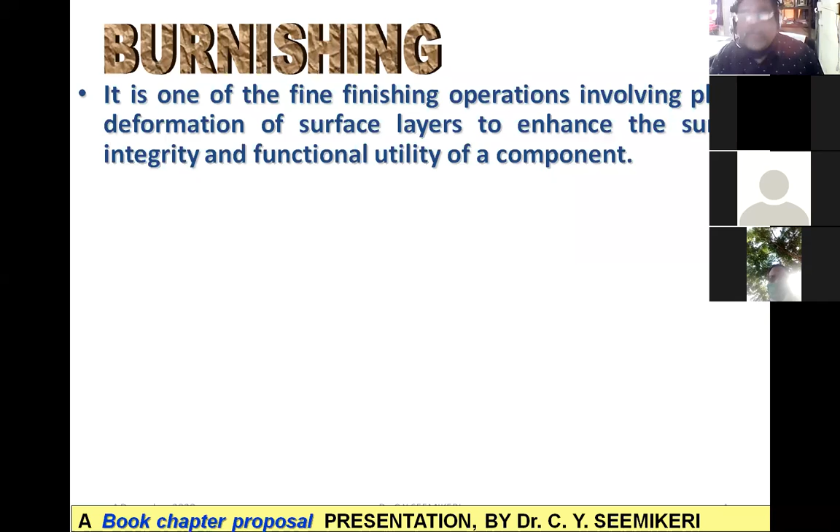We are going to deform it. Definitely there is some reduction in size, and the metal is pressed by a tool, and therefore it undergoes plastic deformation. Thereby the surface layers are pressed to enhance the surface integrity. The better word is surface integrity. I'll talk about that, and then functional utility, so that the functional performance would improve.

Basically, burnishing is a secondary operation, not a primary operation. A primary operation will be like turning, milling, shaping, grinding, etc. Even electro-discharge machining is one of the best primary operations, but it gives a rough surface basically. Electro-discharge machining will give rough surface, even welding. So to enhance the other properties, we go for burnishing as a secondary operation.

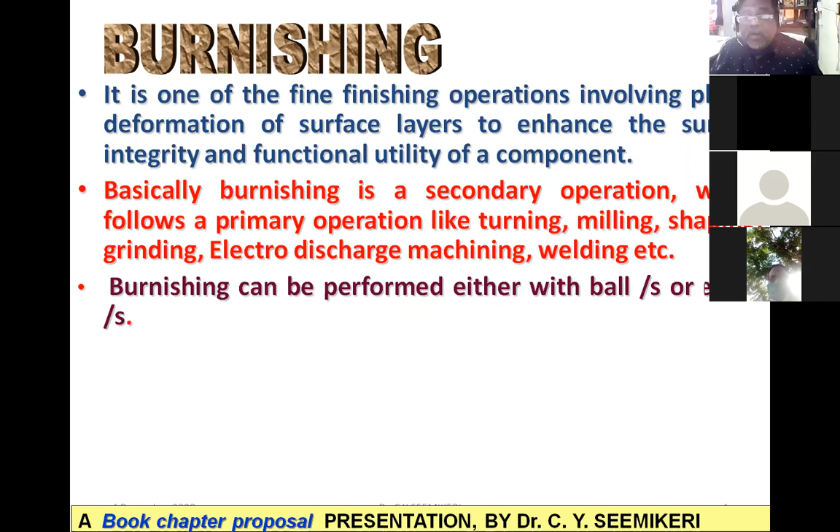Burnishing can be performed either with a ball, one ball or many balls. We can use any type of ball. We'll talk about the material of the ball, the size of the ball and all that. There are wide varieties of ways in which you can use the ball, or sometimes people ask, sir, why not roller? Yes, you can use roller also. So ball or roller can be used in burnishing.

Depending on that, burnishing has been classified into many research potential areas like ballizing. Ballizing means you already drilled a hole, you take a ball and press it inside the hole, and you remove the ball through that. Thereby the hole particularly drilled will be strengthened, and also the shape of the hole will be perfectly circular. So it's called ballizing. A lot of work is going on in Russia still.

25, 30 years back the work was going on, and still a lot of work is going on. Ballizing is another research area. Then burnishing is one general area. Again, there's vibratory burnishing.

If you press that particular ball continuously, it's burnishing. If you have intermittent burnishing, where there will be a little bit of vibrations created, excitation is created for the ball, so that the ball will be continuously, with certain amplitude, hammering on the surface, it's called vibratory burnishing. Again, it can be done with a ball or roller.

And once again, you will have ultrasonic burnishing, where you can create ultrasonic waves. It's one of the latest areas of research undertaken in America right now, in USA, with Lambda Research. Also NASA is undertaking such research work, ultrasonic burnishing. A lot of work is going on.

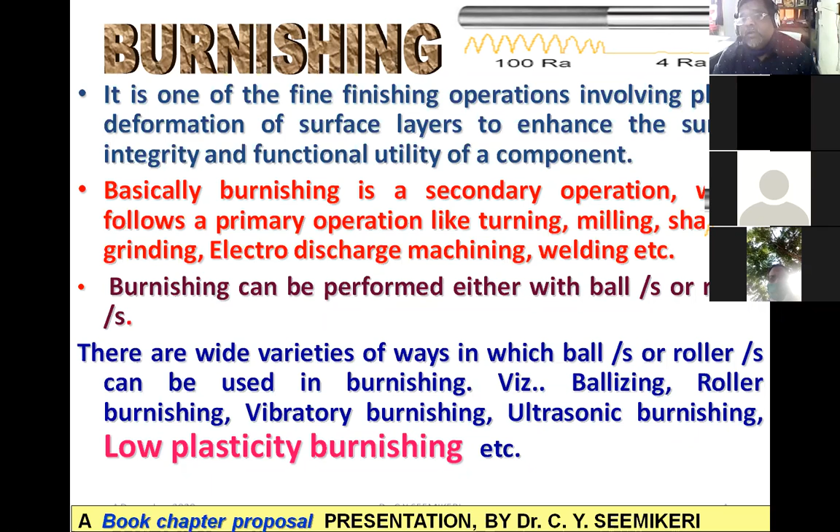That figure shows the surface roughness will change from a certain microns rough surface into a better finish. Schematically, this LPB, low plasticity burnishing, has been shown. In most situations in mechanical burnishing, the ball is pressed by a mechanical force using a spring and all that. The beauty of this particular plastic burnishing is the ball is pressed not by the spring but by the supporting fluid. That's what is shown in the screen.

That particular fluid is forced through the tube, and that fluid pressure is applied through a power pack, hydraulic power pack. So I have designed a particular tool, my research work involves designing the LPB tool. The new LPB tool was designed long back, and a separate ball is kept and pressurized by the hydraulic fluid, which in our case is called the laboratory power pack, utilized to support it so that you can apply uniform pressure.

The beauty of the hydraulic systems is usually you can apply very less pressure also, and constant pressure. That is the beauty. Therefore I utilized oil fluid. Perhaps you can utilize it, even use air also, for a pneumatic burnishing tool. You can undertake that; there's a lot of innovation one can do.

So the ball is pressurized by a certain fluid bearing I have designed, and that is applied on the surface, and the ball will be moving. You can use one ball or more number of balls. I have used only one ball in my case.

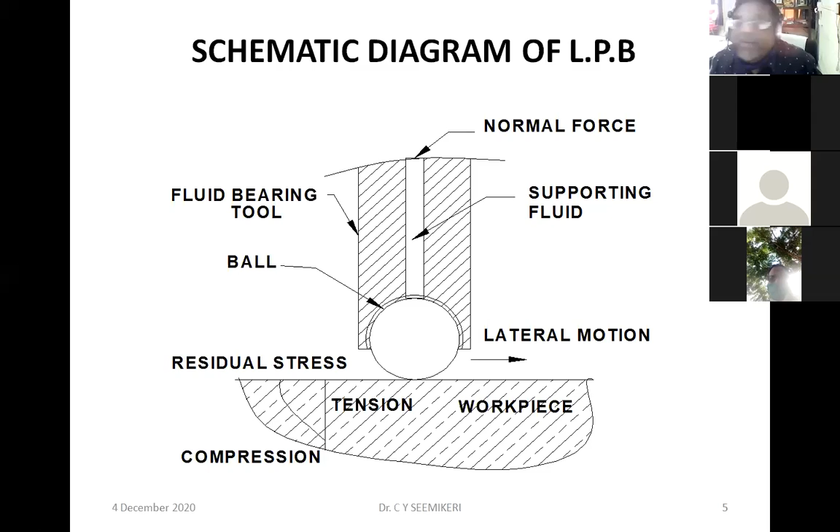So this is the schematic diagram which I have applied. This is the conventional burnishing tool applied to a lathe machine.

My focus of research at that time was this: I am a person from a Polytechnic background, from Ratnagiri, sitting in a corner of Maharashtra where nobody comes for research work, nobody prefers that place. So I thought, why not create some research for our own people, our own public? The technology which is hi-fi available in America, why can't we apply that technology to my rural area and rural people, small workshops, so the technology can be taken from ground level and used in their conventional machines to enhance the strength of their materials.

Why not, I thought. So I designed this particular tool using my laboratory equipment. Hardly any pressure power is applied, and a lathe chuck was used to hold the job while machining.

Then the tool is applied directly on the surface, so instead of machining, now I am pressing the job with my tool. So the beauty of the technology is bringing rural people technology to the common man.

Just like community polytechnic, I was a project officer for community polytechnic, so I thought I can transfer this technology for my rural mass, for the common man. Right now it's called Unnat Bharat Abhiyan.

Back in 2003, I thought why not such simple technologies, though people say it is used in NASA and all that. I also received a letter from NASA, from one Mr. Ramakrishna, the letter is also with me, saying you are doing wonderful work in this scenario. We want to join hands with you so that the technology can be imparted to Indian people. But at that time I had not completed my PhD, so my guide wrote a letter to them saying let him complete his PhD first, then we'll think about that.

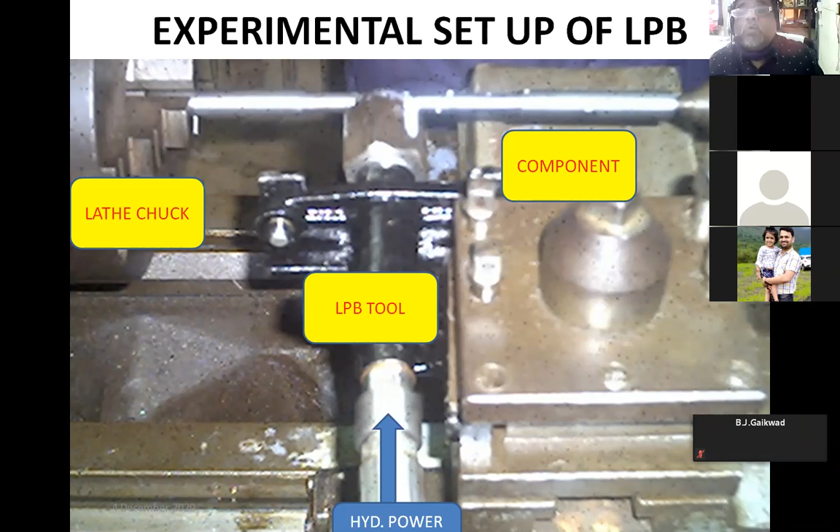So people wanted to join hands with me once I made the technology feasible and possible for the common man. That's the beauty. Therefore friends, I'm requesting you, those who want to continue this work, I'm there to support you.

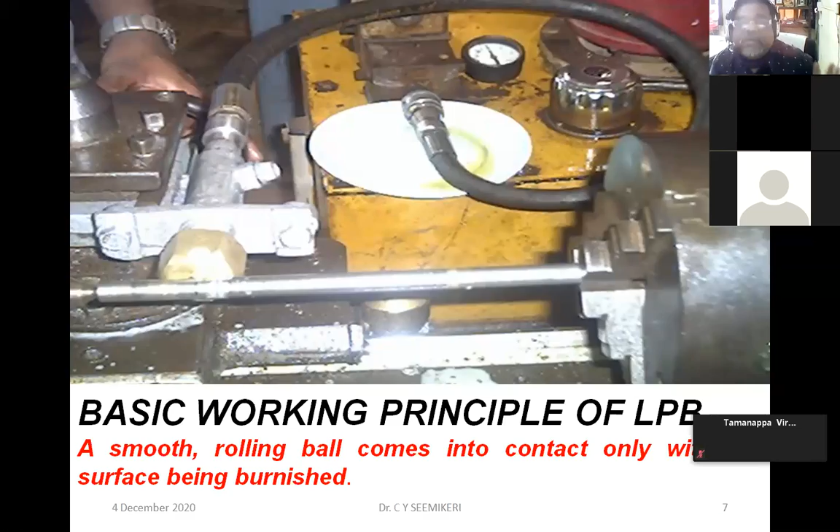In my second point, I told you what is meant by surface integrity, a new field. My focus was overemphasized by one particular paper on a new field called engineered surfaces. The word engineered surface means the surfaces are engineered, doctored, I would say.

Doctored means the surface is changed. So engineered surface, I read this paper that regards it as one of the effective and economic routes to successful manufacture. In 1998, when I completed my master's degree, I read this paper. It's still available, please read it.

The author wrote that once you get the surface out of any machining or manufacturing method, a smart thing you can do is engineer the surface, changing its properties. So inspired by that paper, I concentrated on surface integrity.

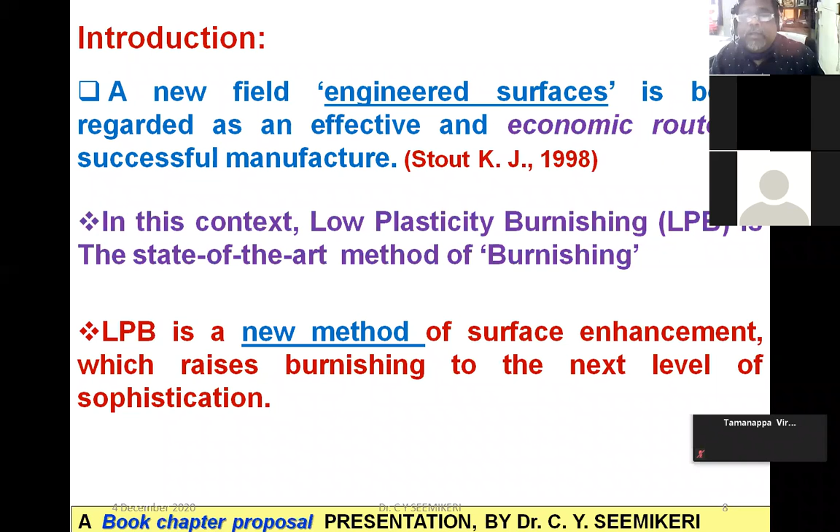In this context, LPB, the state-of-the-art method of burnishing, is a new method of surface enhancement which takes burnishing to the next level. It's one of the best engineering surfacing methodologies, which I am introducing today for burnishing various surfaces. So what does surface integrity mean?

The surface condition is going to be increased, basically changed, because we are making a lot of alterations, a lot of surface changes. As I mentioned earlier, maybe you are introducing machining or welding etc. What you are doing is inculcating mechanical, metallurgical, chemical, electrical, and biological changes to a surface, so surface alterations belong to the surface.

That makes the surface unacceptable, so you require to recondition the surface, reconditioning only the outer layer, not the internal layer, up to say 100 microns or 1000 microns, hardly 1 mm. Those surface properties have to be changed without affecting the internal structure of the material.

Surface integrity is a multidisciplinary activity, not purely mechanical, which has great impact on parts. For example, an Inconel 718 material, which I showed earlier, is used in airplane applications. Its fatigue limit is as high as 540, but after abusive grinding it is as low as 150. So after electro-discharge machining, the surfaces are different.

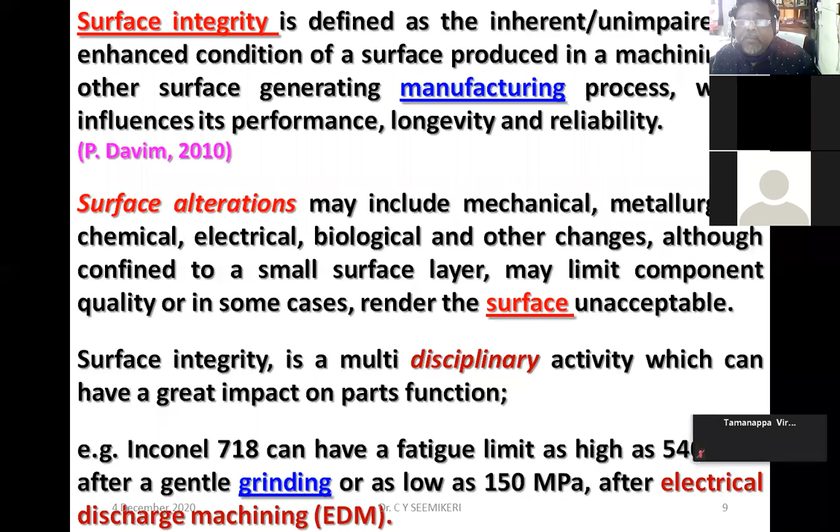So the same material, if you have a different manufacturing process, the fatigue limit is going to change. That is the beauty - manufacturing methods have great impact on the fatigue life of the component. We need to focus on which method to use for increasing the strength of the component, or if it's not possible, I have to use EDM only to get the particular shape and size. Yes, use EDM, no doubt. But after that, go for burnishing or surface enhancement technologies - you can restore the strength and properties lost during the process.

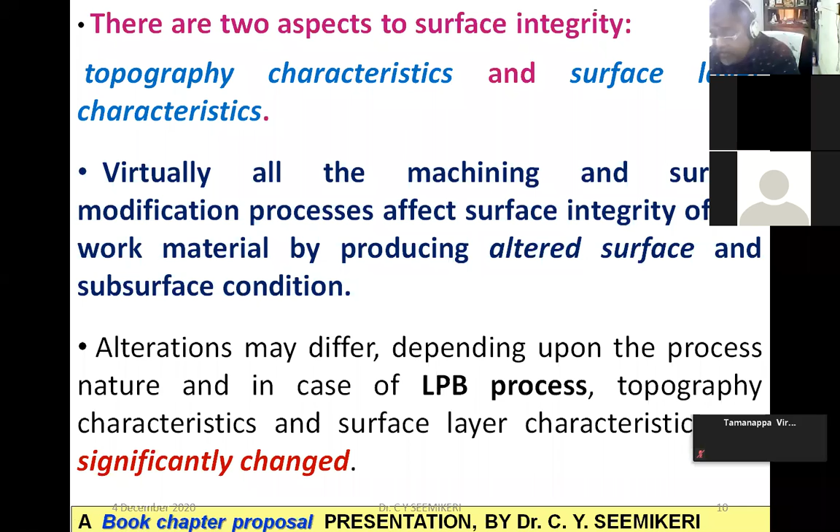The surface topography can change the surface layer characteristics. Virtually all machining and surface modification processes affect the surface integrity by producing an altered surface or subsurface layer - the subsurface is changed, and the immediate surface is also affected. The alterations may differ depending upon the nature of the process. In case of the LPB process, the topography or surface characteristics are significantly changed, along with all mechanical properties. Therefore, it's one of the major innovations in engineering surfaces.

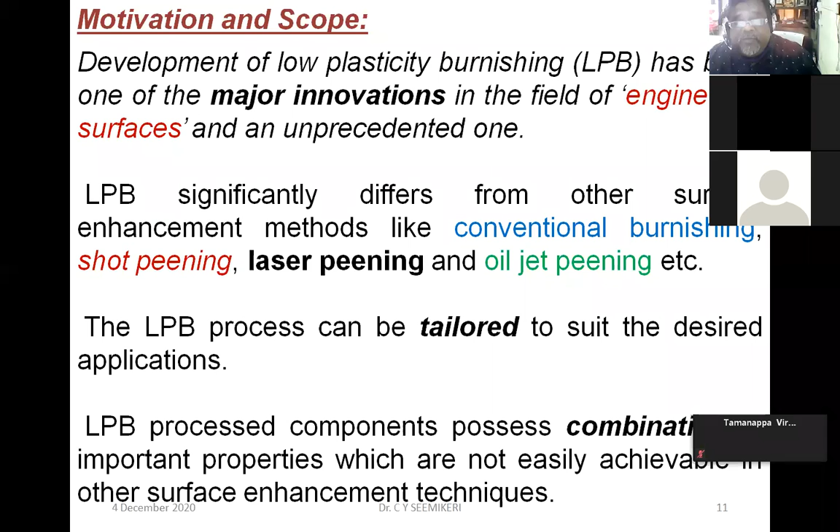Apart from conventional burnishing, shot peening, laser peening, oil jet peening - all of which I mentioned - the LPB process can be tailored to suit the required applications. You can use it in combination with many other processes also. Therefore, LPB has proved its worth over the last 15-20 years. You can enhance many properties which are not achievable by any other surface enhancement techniques.

These involve surface hardness, surface finish, low cycle fatigue, and high cycle fatigue, and corrosion resistance. I'll explain the difference between high cycle fatigue and low cycle fatigue.

If I take an example - a boiler is subjected to low cycle fatigue. If you take a particular boiler right now and heat it, the temperature goes very high, in thousands of degrees centigrade, because the steam you get is high pressure, high temperature steam. Slowly the machine components undergo fatigue. Why? It gets heated, meaning materials undergo creep condition because the material expands due to coefficient of linear expansion. Then when you stop the boiler, it starts cooling. So heating and cooling cycles are very slow - that's called low cycle fatigue. The material is subjected to low cycle fatigue. The bolts, nuts, etc., and many other materials used in a boiler are subjected to low cycle fatigue - this is called failure due to low cycle fatigue.

If you have high cycle fatigue, for example, the shafts run at very high speed, more than 3000 RPM. Because of the high speed and number of revolutions per second, if you take one particular point on the surface, it undergoes failure due to a high number of cycles - that's high cycle fatigue, where the same primary point is stressed again and again. Take a car tire moving at very high speed - that's high cycle fatigue too. So both low cycle fatigue and high cycle fatigue are important parameters for any mechanical engineer.

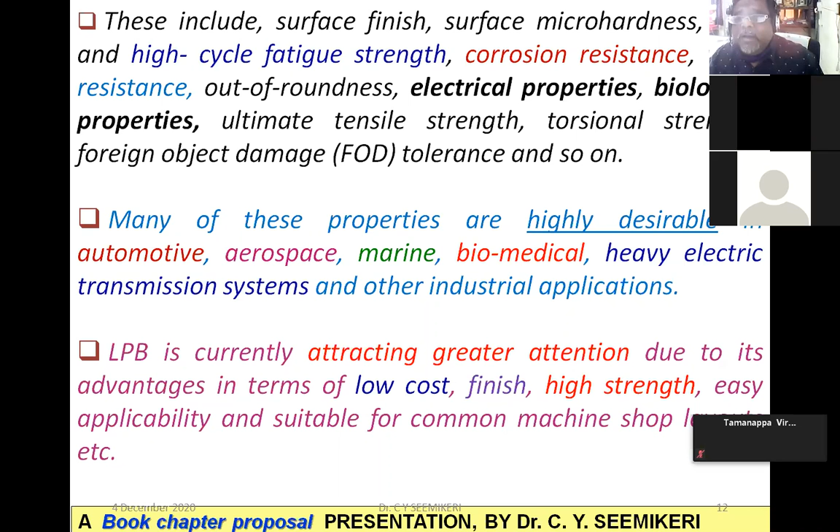Many small and medium scale industries around Ratnagiri in 2003-4, I could enrich. I remember the industry names also in Devruk. They could get the benefits. Earlier they challenged and insulted us, then they started working on it. Usually there is a lot of resistance in the beginning. People say, what can this bloody teacher tell us, we are industry people with more experience. But when they get the results, definitely they will come to you. That's my earnest request to friends: work hard, get into the roots of the variabilities.

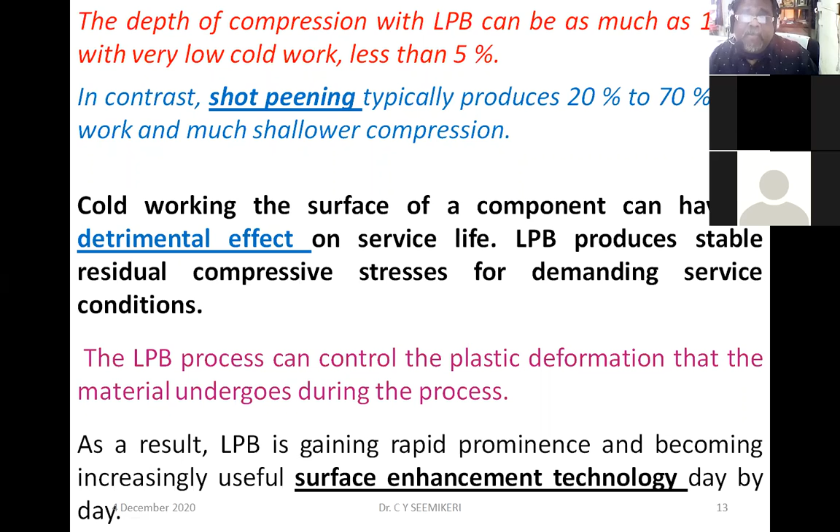So LPB is gaining a lot of prominence and becoming an increasingly useful surface enhancement technology day by day. It is catching the attention of many researchers across the globe, not only Indian researchers. A lot of people are working on LPB right now, even in the Indian scenario, apart from other countries. The scope of research now, my today's focus for the next 45 minutes will be on this.

Biomedical applications and electrical applications - please listen carefully how we can undertake research work in these two areas. There are many areas, but I'm introducing today's talk on only two. How it can be beneficial to biomedical applications - the same mechanical engineering is beneficial to the medical field. My daughter also belongs to a doctor's family, she is doing her MD and then DM in neuroscience, so probably I'll be joining hands with her in further research work.

Biomedical manufacturing technologies are achieving very highly visible positions in all manufacturing front lines, especially medical implantation, healthcare services, and surgeries. So the focus right now will be on medical implantation.

Medical implantation - especially nowadays almost all 50-plus people have problems with their knees and hip joints, which are being treated. There will be a lot of prosthesis, hip surgeries and knee surgeries, knee replacement, joints being replaced. These are common things nowadays, common even in Nashik. There are so many doctors, orthopedicians, who recommend knee joint replacement because the patient cannot walk freely, cannot even stand on his legs without support. So it is inevitable for all of us to go for certain medical implants.

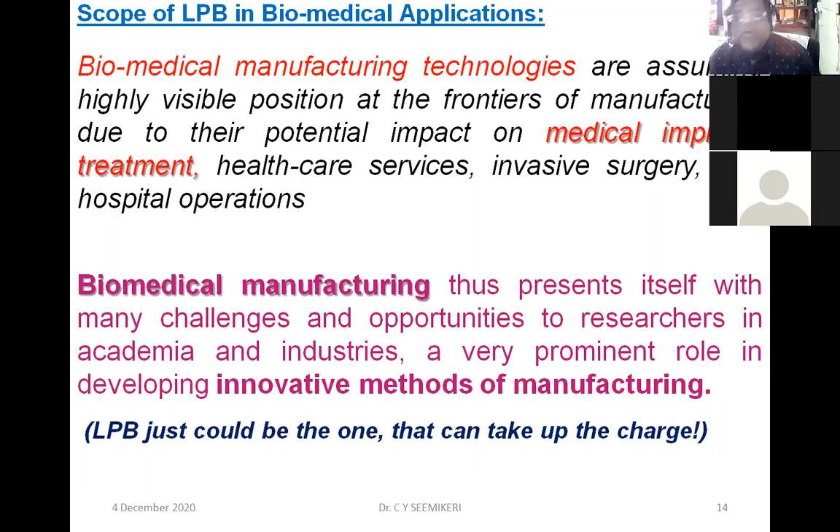It means we need a lot of research work within this area to produce different manufacturing surfaces. It can even be dental applications also - forget about prosthesis, even replacement of teeth, or filling materials in between the teeth, in prosthodontics as we call it.

So what happens, friends, is that if you are putting a material in the human body, there are very difficult conditions - a corrosive environment. There will be a corrosive environment because the body, the saliva, whatever the body is producing, is basically salty. So it's a corrosive environment for that material, and therefore the material which is implanted into the body will not survive for a longer period.

The moment you start putting a particular material into the body, in the knees or hip, the material starts degrading. Its degradation starts, its failure starts. It's called fretting damage, or fretting fatigue.

So therefore, we need to control its surface properties as per desire. We need to recondition the surface according to the requirements of the patient. Every patient is unique, so you must find out what sort of surface finish and strength is required for the particular job to be implanted.

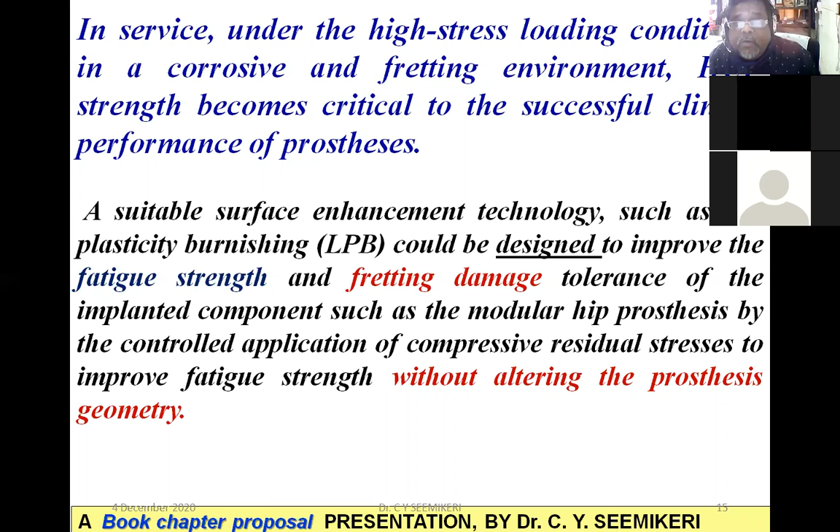So cobalt, nickel, chromium alloys, nickel-titanium, etc. are finding applications now in artificial joints, dental implants, bones, plates, staples, even for surgery. Heart patients also, coronary artery - so many materials are being used now in the human body for implantation.

Therefore, corrosion resistance, good surface finish, and corrosion fatigue are important. It should be cost effective and also biocompatible - that's the word I must use. It should survive in 0.9% saline, basically NaCl, which is generally not a conducive environment for implants.

The moment you start putting the material in, failure starts. Therefore, shot peening and other peening methods are probably not suitable here because they produce inferior tribological properties. They may also introduce corrosion due to more cold work, making them less compatible. So probably LPB is best compatible.

It's not my research work - recently a paper was written from NASA. Even Lambda Research has shown that the material finished by low plasticity burnishing is definitely more compatible than other manufacturing processes for implantation.

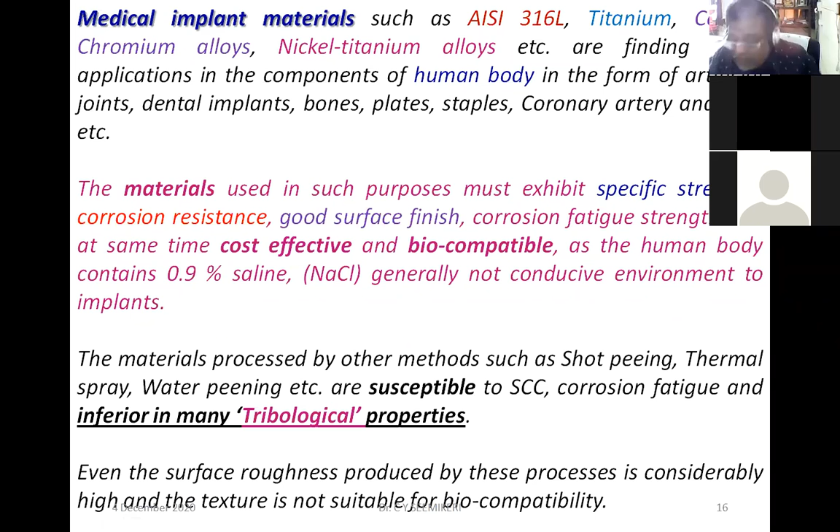So a lot of potential is there for us. The host tissues, or debris generated by the body in the joints, are going to be large. After some time there will be debris inside the body, released due to the foreign material. How to reduce that?

It can be done by LPB, by inculcating all these properties in the same component in a holistic way, in an economical manner, without side effects. Very important friends - it's not my research work, many researchers have given these results in research papers, putting forward this particular point.

LPB has taken on this complex assignment of inculcating better surface properties by incorporating various mechanical properties suitable to the patient in a holistic way - whether he wants more strength, less hardness, or more resistance to corrosion, according to the condition of the patient and the location of the job, without major side effects. I won't say without side effects - there will be certain side effects when you implant a material, but less side effects and also economical.

It should be feasible for the patient and doctors to implant. So what I conclude from this is that LPB can definitely be very handy and useful for doctors and patients across the whole country, across the globe, across the whole state of Maharashtra, probably for rural people also, since the cost of replacements is very high.

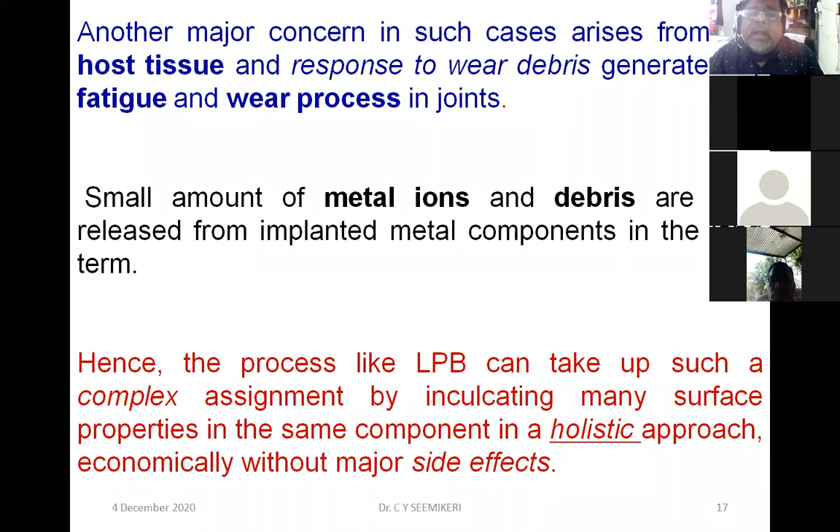The next thing I'm putting before you, in the next 10-15 minutes, is how LPB can be applied for changing electrical properties. This can again be useful for basic consumers as well as common people, MSEB engineers, and all of us engineers.

So how could it change the transmission? I'm not doing any research work on this one right now. My research contribution in this area is zero. I'm only exploring the possibilities that in future you can take up.

So I have done a little bit of basic work, and I have given some work to my PhD students. As I told you, I am already getting certain PhD work done. One of my PhD students has already completed his PhD, not in burnishing, but in some other area. Two of my candidates are pursuing work, one in burnishing, another in friction stir welding, etc. The work is going on, but this particular topic I have not given to anybody still.

Electrical power transmission. Friends, we all know that electricity is very scarce in India and it's very costly. Recently, I think it has become a political issue also, that the bills given to us are very, very high. It's very difficult for the common man to pay these heavy bills, as seen during lockdown.

It means the production of power is very high, manufacturing of electricity is high, and then there is also transmission. Once you manufacture electricity, then there is distribution, what's called transmission and distribution. Friends, the losses are around 10 to 15%. We never notice it. Electricity manufactured and used at the source has very less losses, but when you use transmission lines, whatever you manufacture, 10, 15%, even more than that, some people say it is around 20, 30% also, we are losing just in transmission from one location to another.

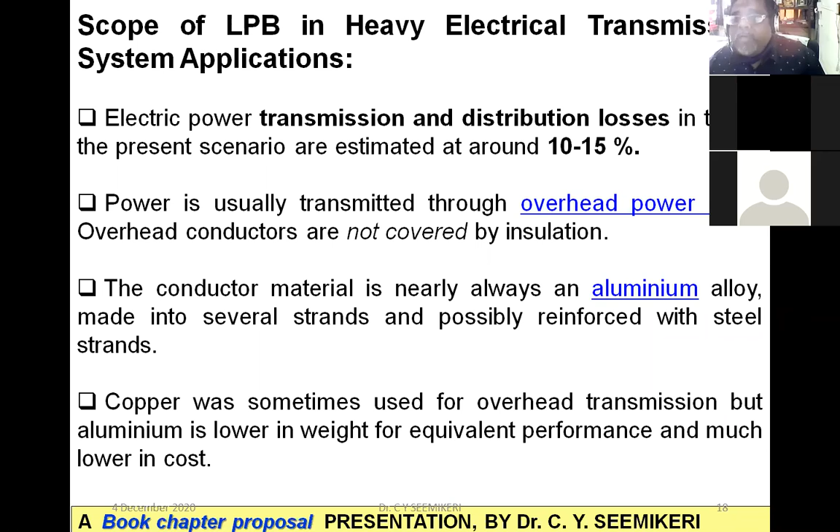Of course, there are other countries where instead of overhead conductive wires, now I think they are transmitting through gases directly without wires also. But in the Indian scenario, we are still using this.

The origins of the limits: for short lines, heating of the conductors occurs because of the transmission of electricity, and obviously there will be a lot of transmission losses, and heating when transmitting electricity. So you can notice that while transmitting electricity, because of temperature, because of the stress, and because of the heat, the particular material undergoes creep. Creep is the biggest failure hurdle there. Creep, I think every mechanical engineer knows it.

That is the reason why there will be overheating, because too much current is drawn, conductors are sagging close to the ground. You can observe the whole cables are sagging, coming down, touched. They are applied a lot of tension at the ends, pulled. At the same time, because there is elongation due to heat, they sag. This is due to time, temperature, and stress - TTT - you know there will be creep, it will be sagging, so they come down.

The strength is also reduced. At the same time, they're losing material properties, which also get changed. The surface properties will change, and the inner properties will also change.

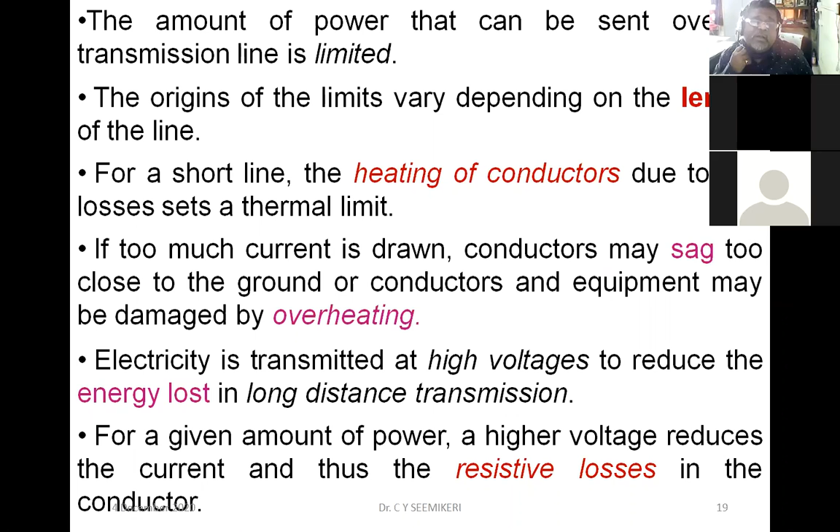The conductor size, cross-sectional area, is another parameter. So the circular cross-section is better. People also try to change the cross-sectional area of the material - for example, with aluminum, whether to go for circular cross-section or oval. If you go for elliptical or box shapes, they are not suitable because of stress concentration and other issues. So it is proved that the circular cross-section is better.

Again, the question is what should be the size of the component, whether it should be 12mm or something else. It depends on the voltage, etc. So it varies from 12 mm square to 750 mm square, depending on the resistance and current carrying capacity.

So thicker wires lead to relatively small increase in capacity, and there's a skin effect that causes most of the current to flow to the surface. What happens is, if you use bigger wires, the current flows mostly through the surface instead of the center - most of the surface is being utilized when the current flows.

High temperature superconductors are actually promised to revolutionize power distribution by providing lossless transmission. But in any scenario, these high temperature superconductors are very costly. If we use this, we can have lesser loss, but we are not able to use it right now. We are still using conductors with larger wires relying on the skin effect only.

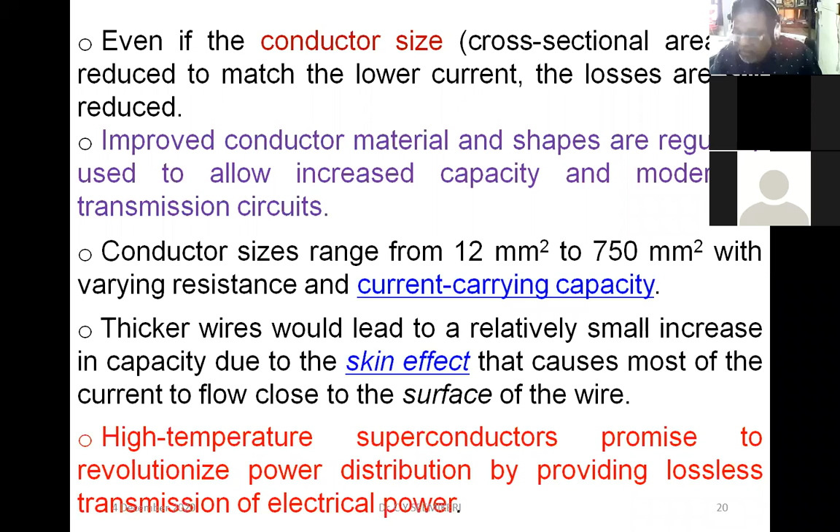But right now, to tackle the situation, we need to work with what exists, and thereby change whatever is there - a little bit. That wire itself, we can change the properties so that we can restore certain mechanical things. So looking at the losses, how can we address this? We can address the surface properties of the conductors - they are doctored or changed to suit the conditions. What we can do is engineer the surface, or dope the surface, to change the properties a little bit.

It may lead to reduction of the diameter of the wire. If you reduce the diameter of the wire, your strength-to-weight ratio will increase, and mechanical strength will improve - finish will improve, surface hardness will improve, low cycle fatigue will improve, and creep will also improve. It will also change the electrical properties.

I won't claim much here about exactly what will change, because the research work is still going on. A lot of people are working on that, both electrical engineers and mechanical engineers. How all the electrical properties are going to change is itself a basic research area for electrical engineers. As mechanical engineers, we can increase the strength of the material so that we can reduce the diameter, and thereby material can be saved.

We can increase the strength of the creep so that the life of the component, life of the wire will improve. The sagging of the wire can be reduced, or we can improve the hardness. The fatigue strength, low cycle fatigue failure can be reduced, thereby also increasing the conductive property a little bit.

If you increase conductivity a little bit and get good results, that's still significant, because more the conductivity, lesser the losses. We need certain good research results to prove that we can enhance electrical properties as well, along with mechanical properties.

Do such experimental work - this is what outcome-based learning, what MSBTE says. Teach such things, give your students such jobs and practicals. Rather than saying research is not required for Polytechnic, say research is a basic aspect for every teacher. Every principal, every management person will say 'why do we require research work, why do we require this?' But I request you friends, research is mandatory, a basic requirement for every teacher to enhance his knowledge. Teachers are the basic carriers of knowledge.

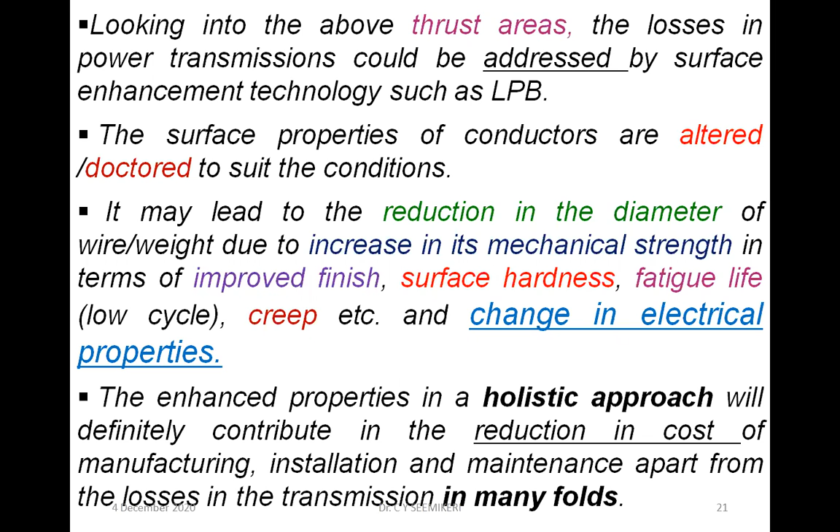They should be given a chance to do research work, a chance to do practical work, so the knowledge can be enhanced. Research is not to get increments, not to get a salary hike, not to get the post of principal or HOD. It is for the students, for the society, for the government, for the public.

So coming back to the point, I stress that such basic experimental work - when you take a copper or aluminum job and test it for fatigue strength on an RR Moore type machine, the strength has increased, meaning the fatigue life has increased. You can check the same job for conductivity, whether it changed or not - let students check if conductivity improved, or if it's not changed, let it be. Some students will check if corrosion resistance improved once burnished versus not burnished. Simple jobs.

You may not do a lot of research work, but a little experimental work will show that with burnishing, mechanical strength has increased. You can measure its finish using a metrology laboratory. You can measure surface finish with a Talysurf instrument available in almost all laboratories. You can measure surface hardness - either conventionally or using surface hardness equipment. Nearby industries have micro hardness testers that measure in HV.

So I have done a lot of research work - refer to my papers, my contribution here, on how after burnishing the surface hardness has improved and to what depth, up to 1 mm depth it increases. I have already published results on this. Fatigue I have also presented for common materials like steel, but not for copper or aluminum. So you can undertake different materials and check for low cycle fatigue, creep, corrosion, electrical properties, how ductility changes, how torsional resistance changes, and so on.

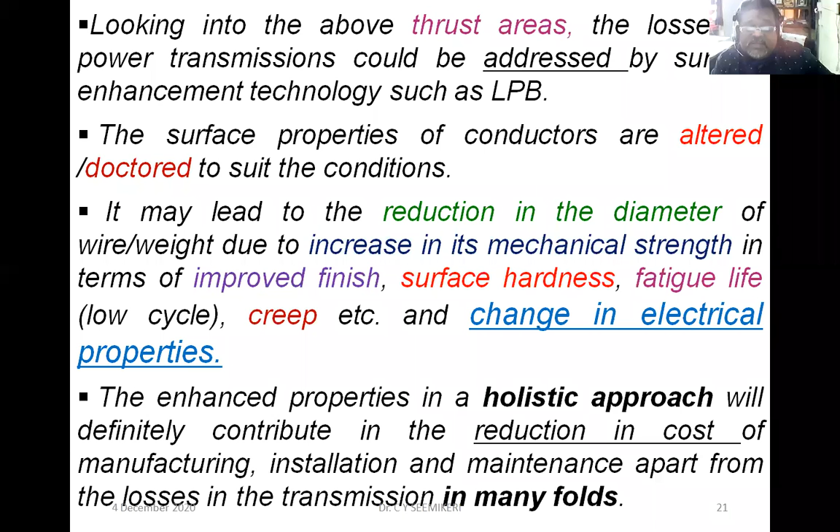I won't say definitely, but if you continue the research work and come out with results, you can give results - yes, in every area we can contribute this. So I have gone to the review of literature, relevance of the proposed work, LPB. Very few experimental studies in this area have been conducted so far - I told you, still only 15, 20 years. The studies have mostly been aimed at aerospace materials.

I told you, because a lot of research is going on aerospace materials - 7075 T6 aluminum alloy used in aeroplane applications, Inconel is also an aeronautical material, Tungsten alloy, Titanium 6Al4V. Such materials have been done through LPB, which can be applied to all types of carbon and alloy steels, stainless steels, cast iron, aluminum, titanium. We can apply it - who stopped you? Nickel-based superalloys - you can conduct research work on that. Your paper gets published. So we have a lot of scope of applying LPB to different materials. Forget about other areas - the same materials can be tested.

Further, these studies have been conducted with certain specific objectives under certain experimental conditions using different machine tools. We can use the machine tools of our own - why can't we go for CNC machines and tooling? We can use our own layouts, our own simple lathe machines, or simple machining, milling machine attachments. Why not? That should be our focus.

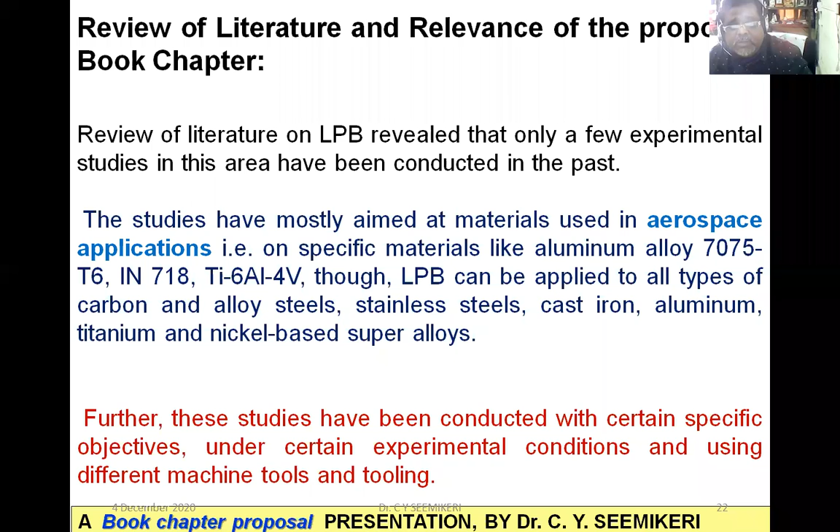Therefore, I am identifying research potential today to my young budding engineers: use of LPB in biomedical applications, use of LPB in heavy electrical applications, use of computational methods.

For those interested in computer applications, you can use computational methods for analyzing LPB. Why can't you analyze the LPB itself? You can do finite element modeling, or go for designing the tool itself, or apply LPB for analyzing what parameters affect surface properties, and how to control them to get the best possible combination for required finish, hardness, fatigue, etc.

So use of computer software, or you can design your own softwares. Right now nothing is available. You have to go for experimental work and produce it. Why can't you have your own mathematical modeling on that, so that mathematical equations are directly available?

Put the required conditions of the parameters and the levels, and you can define the outcome of that. So certain regression models and mathematical equations you can prepare. So there is a lot of research potential still available, young friends, which you can explore through this research work. Apart from basic materials, these are the various exploring areas.

So in order to achieve this objective, it's necessary to make a suitable experimental plan. Without experimental work, nothing can be proved. So you have to select a suitable strategy of experimentation. You can use design of experiments here, which I think was already taught in the first session. The accuracy of the experiments again depends on what type of strategy you followed.

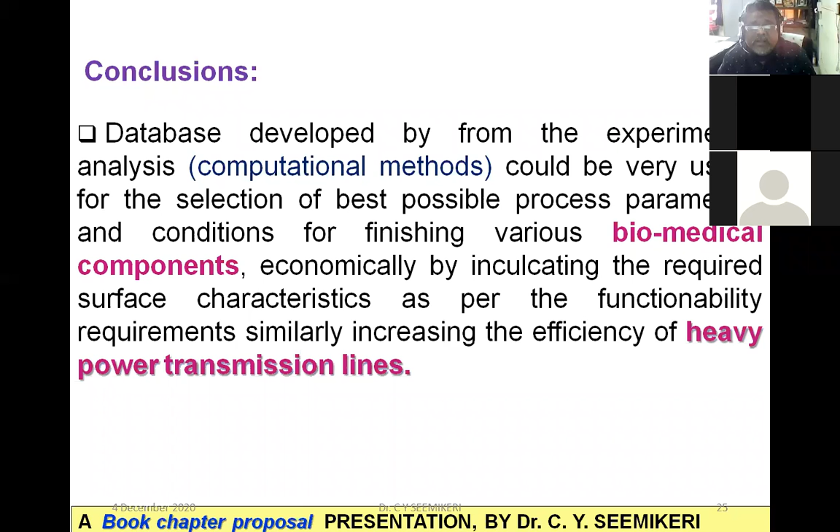Also apply this on electrical transmission lines - you can go for aluminum material, copper material, go to the MSEB, get their materials, simple material. You ask them, sir, we will give your material, we will try to burnish it, we will try to peen it, then give it back to you. You can check the properties, how it will make a difference in the efficiency of transmission or efficiency of development of power, etc.

So for my references, we have our reference publications. I have referred to my guide Brahmankar, my co-guide Dr. Professor Mahagaonkar, who is right now working in Mumbai. We had these papers long back. Jayaraman, I told you, and Prevey - these people had already done a lot of work. These are the people who interacted with us, who invited us for further research work in Indian conditions. So various publications are available on the net, and we are open to you - you can use these publications for enhancing and enriching your knowledge.

If you want any discussions, any doubts, you can always meet me. Or if you have any basic questions right now - I have not talked much about the parameters of the process. A lot more information is there, but I thought probably the heavy dose is not required. If you are really interested, go through the basic studies, basic chapters, and then you can definitely discuss with me.

So therefore, at the end, I just want to thank one and all. Over-burnishing is not at all good - it will lead to over-peening or cold work.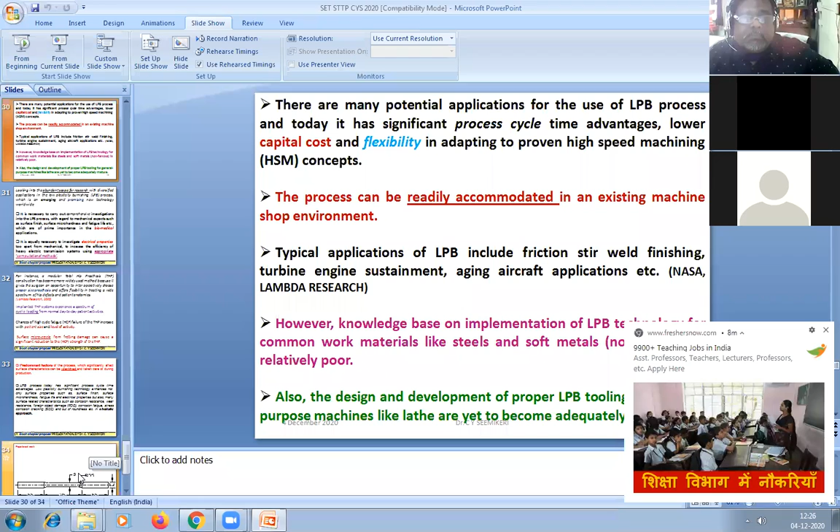Sir, there is a general question: what are the research domains in which a new researcher can begin his journey in surface enhancement technology, sir?

Yeah, I think I have already mentioned this once. There are infinite openings, I would say. For newcomers, they feel like there is no opening, but from my point of view as a researcher, it's infinite. Everywhere you can enter. The first entry, as I told you, is you can apply the LPB tool directly to different materials. First entry is use different materials.